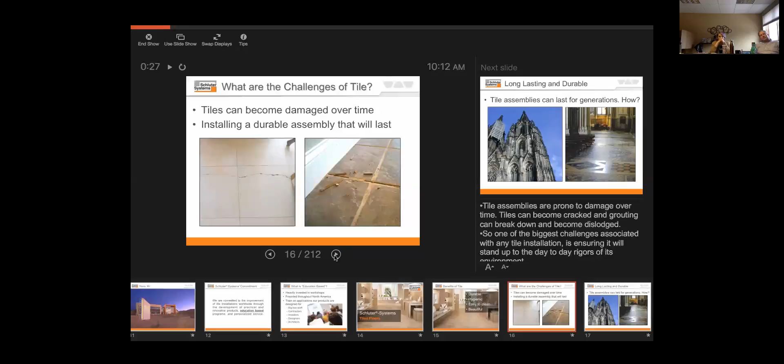But the challenges we face in the industry are what we see in these two photographs here. It's very common to walk into either a residence or a commercial space and see these types of things happening: cracked tiles, grout falling out of the grout joints. That's something we are definitely up against and is a struggle within our industry.

Looking at these two photographs, we see on the left a building approximately 900 years old, and on the right a tile floor approximately 400 to 500 years old. One of our territory managers was in Cologne, Germany at this cathedral taking close-up photographs, and was amazed he could walk through a tile installation 400 to 500 years old and not find a cracked tile or a cracked grout joint within the installation. So how is it that 400 to 500 years ago they could execute this installation, and today we have difficulty seeing a tile installation last even a couple years?

And we've got a video here that hopefully will play. Maybe not. I'll certainly make sure I can embed that video in an email and get it to everybody afterwards. Basically what the video does is give you a rundown of an installation that was executed 400 to 500 years ago, how they did that, and how it's drastically different from what we do today.

That wire-reinforced mortar bed with a slip sheet underneath it was the principle we refer to as uncoupling. Uncoupling is what allows the building to move without affecting the tile layer on top of it. With direct bond of tile, the stresses within that slab or substrate move directly through to the surface if we don't have something there to give you that forgiveness in the shear plane.

So cracks in the substrate become cracks in the tile. The other thing we see happen, specific to direct bonding to a slab, and specifically a new slab, is buckling, caused by the shrinkage of the concrete. If we install tile over green or new concrete, over that first 28 to 30 days, all the moisture leaves that slab, so it loses real estate—but the real estate of the tile on top doesn't change.

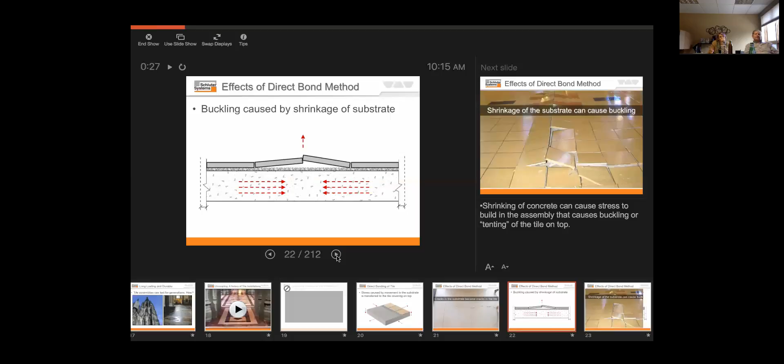And concrete cures literally for 20 years. It's just the first 20 to 30 days when most of the moisture comes out, but it's still curing. So you can still see shrinkage cracks from concrete 10 years later. We joke in our industry that there are two kinds of concrete: concrete that's cracked, and concrete that's going to crack.

So when we talk about shrinkage or loss of real estate in a tile installation, we look at this photograph of a floor in a church. What happened was they started seeing wear patterns on their tile, so they decided to disconnect the pews from the floor, since they were mechanically fastened, move them off to the side, and hire a cleaning company to buff and polish the whole floor so it would look beautiful again.

So they removed the screws, moved the pews out, and the cleaning crew came in the next day to clean—and this is what they find. All those pews were mechanically fastened, holding that tile into place, and as soon as it was released, the pressure and movement stress allowed the tile to move, and this is what happened.

So addressing substrate challenges, we're referring to our product Ditra. What we do is the uncoupling principle I briefly referred to - we also give the ability to waterproof a floor installation. We deal with vapor management, with smaller amounts of moisture from the substrate, typically a concrete floor more so than a wood floor, and we give substantial load support.

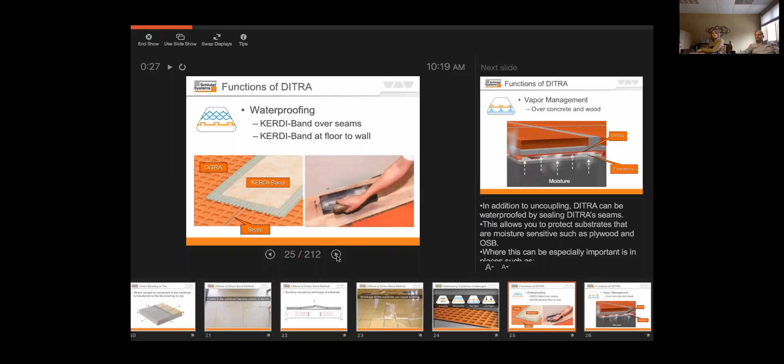Vapor management over concrete and wood - any moisture, like we talked about, concrete will cure out over years and years and years. The benefit of Ditra over a slab is that all that moisture is kept within the slab, so it's not allowed to leave, which would cause the concrete slab to shrink and crack. That moisture is kept within the slab, so it's wet curing over the life of its installation.

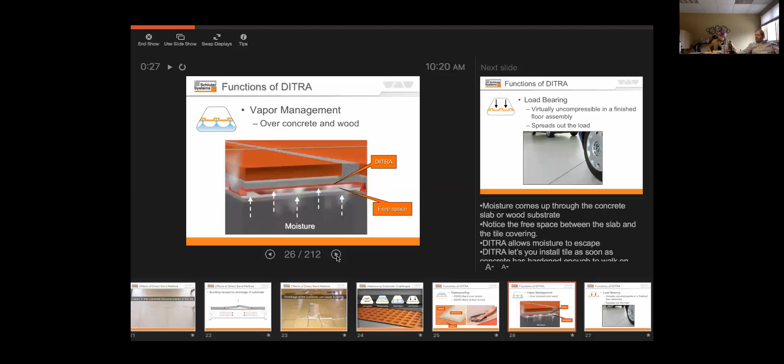And then load bearing - we see a lot of installations of tile in car dealerships, and I've been through a lot where you see cracked tile issues. But I've also been in several where our Ditra underlayment is underneath them and they're driving cars across them all day long, every day, in and out of locations where you'd bring your vehicle in for service. A lot of service departments are now drive-through, and we see a lot of success with this underneath, as far as load bearing is concerned.

I'll have to also get you this clip - this won't play, but it's just an animation that shows the function of Ditra.

I'll briefly explain it. As your substrate expands and contracts, the membrane itself, with the open airspace within it, allows for the movement to take place in your concrete or wood subfloor without affecting the tile on top. You'll notice the thin set bonding the tile to the membrane is actually filling a dovetailed square, so the thin set isn't stuck to plastic - it's mechanically fastened with that dovetail configuration. That's kind of how it works.

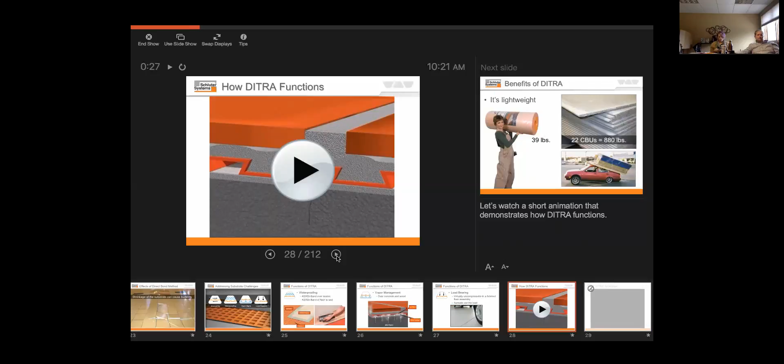As a tile contractor, this sold me - the fact that I can take the square footage equivalent of 22 sheets of backer board into a house in one trip, on one roll. Yeah, that roll she's holding there is the square footage equivalent of 22 sheets of backer board.

I can take that into anyone's house. I can cut it with a utility knife and thin set it to the floor, and within a matter of hours I'm ready to set tile. Whereas with my competition's backer board, they're still carrying it in. Or let's face it, in our climate here, in the months of November through February or March, it could be snowing or raining or just terrible weather conditions, and you're set up outside cutting this stuff, because you're not cutting a sheet of backer board inside someone's house.

It's easy to transport. You can fit essentially what you would need for a 323 square foot area in the back of a car. Whereas you see the gentleman walking out with a roll of Ditra, and you see the other two guys loading sheets of backer board into a pickup.

Like I said, easy to cut, no dust, no mess, and virtually no wasted material. For the functionality of Ditra as a membrane, you can put it in as small pieces as you can cut, virtually. The only thing where that would present a problem for you is if you wanted to waterproof it. Obviously, if you're waterproofing the installation, you would want to eliminate as many seams as possible.

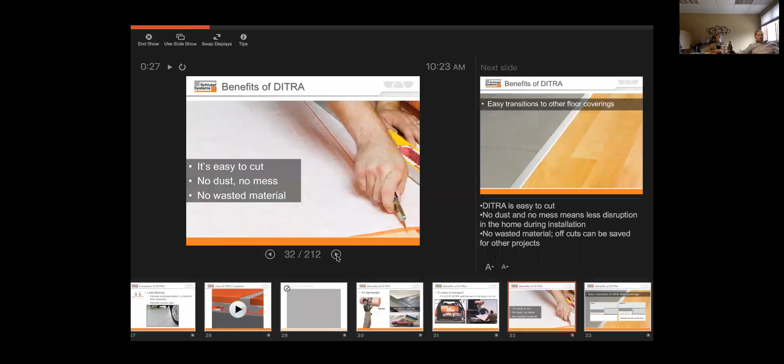This Ditra is very easy to transition to other floor coverings. We manufacture it in two different types, actually three different types now if you include our Ditra Heat product. But there's Ditra at 1/8 of an inch or Ditra XL at 5/16 of an inch. These two offerings give you the ability—Ditra XL gives you the ability to flush out with a solid 3/4 hardwood.

We brought Ditra XL out after we started noticing a lot of installers using Ditra, but then the popularity of a solid 3/4 hardwood came back, and these installers were either installing two layers of Ditra or doing a transition from wood down to tile, which was not aesthetically pleasing. So Ditra XL took care of that.

And then now we're getting back into large format tile with medium bed thin sets underneath them. These large format tiles, being a minimum of 3/8 of an inch thick with a medium bed mortar under them, are actually working out really well with Ditra to flush out to a solid 3/4.

Is there any benefit of using the cement backer boards anymore? In my opinion, absolutely not. A CBU—Duroc, HardieBacker, Wonderboard, any of them—they don't give you any structural integrity.

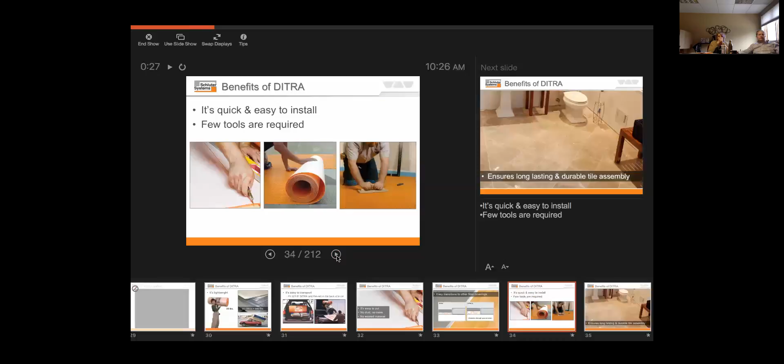So just a couple slides showing how it goes down: cutting it with a utility knife or scissors, very, very easy, troweling out your thin set, and installing it. This is ensuring a long-lasting and durable tile assembly.

So I have a quick question—is this just for floors then, or would you also use it on backsplashes and shower walls? This product is specifically for floors, but we do offer other things which are specifically designed for wall installation, and we'll get into that in a later part of the presentation.

I have a question as well—can it go over just about any other kind of floor? So if I have a customer that has a vinyl kitchen floor that they don't want to remove, can it go over the vinyl and then you can tile over that?

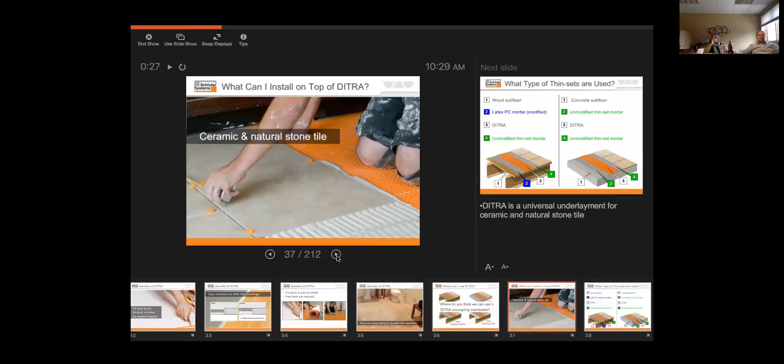So, what to install on top? Ceramic, natural stone, and then obviously porcelain. And how to install it.

Over a wood subfloor, we recommend a modified thin set to bond the Ditra to the subfloor. And then everything on top is always going to be non-modified. The reason we qualify the type of thin set is because modified thin sets need air to cure out, or they need something to pull the moisture out of them. A wood subfloor is very porous, and it's going to pull the moisture out of the latex modified thin set, whereas on top of our membrane, being plastic, air is not going to go through that. The moment we put tile over the thin set on top of our membrane, very little air is ever going to get to that. So that's why we call out non-modified, because it simply needs time, not air, to cure.

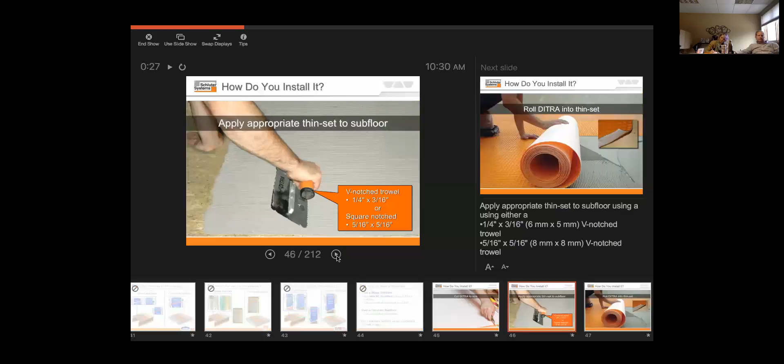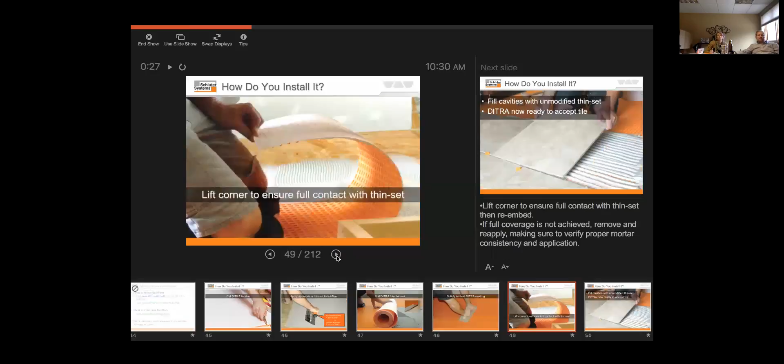Just a couple slides that show the installation real quick: cutting it to size, appropriate amount of thin set going onto the floor. Roll the Ditra into place, embed it using a wood float or a grout float. Pull it back to ensure that you've got coverage. Fill the cavities, trowel thin set, and set tile.

Here's some of the benefits that I like to quickly go over, just to show the amount of weight that you're eliminating, the amount of time you're eliminating, and all the mess that you are eliminating.

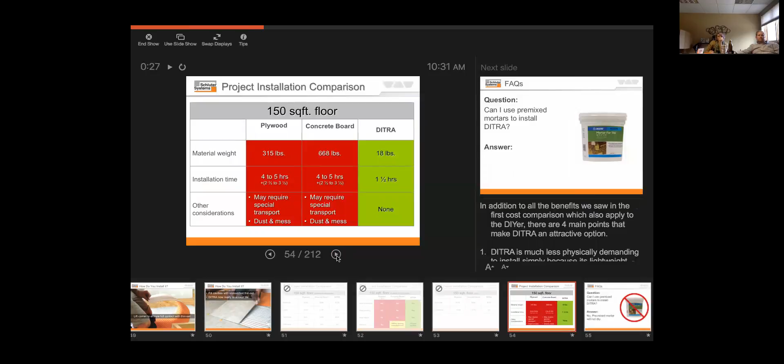So, premix mortars to install Ditra? Never, please never, we don't like premixed anyway. I like to call that Satan in a bucket. It is not your friend. I simply illustrate the fact that I can go to any big box store, grab that bucket off the shelf, not knowing how long it's been there. I can crack the lid on it, it is pliable, I can use it on a job, put the lid back on, set it on a shelf for another 6 months, go back and crack the lid again, and it's still pliable. It's the equivalent of Velveeta cheese. So definitely, please, please, please do not use that.

So is it necessary to apply Kerdi-Band to the seams of Ditra? Only in a waterproof situation. Perfect.

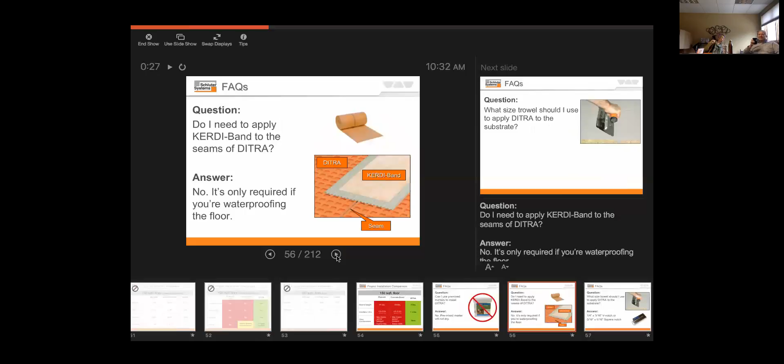And the trowel size is a 1/4 by 3/16 V notch, or a 5/16 square notch for installation.

What kind of warranty does Schluter offer? I like to qualify our warranty versus a lot of other warranties in the industry. It is a 10-year warranty, but it is a labor and material warranty. Typically, a lot of manufacturers offering a lifetime warranty, it's product only, and a lot of times prorated.

If you use another manufacturer's underlayments and your total costs are $500 to install your floor, underlayment and thin set, and 5 years later you have an issue, they're going to give you the prorated value of that $500 worth of material, which barely covers a fraction of your tile. Our 10-year labor and material warranty covers the cost of tearing everything out, all the materials that need to go back in, and the labor to put it back in.

Where are the gray areas, as far as if it's installed correctly in the first place, or do installers need to be trained for that to follow through? The only gray area is installer error. There is no requirement for being a certified installer. Obviously, if it was installer error and the installation was less than stellar, you would have issues regardless if it was our product.

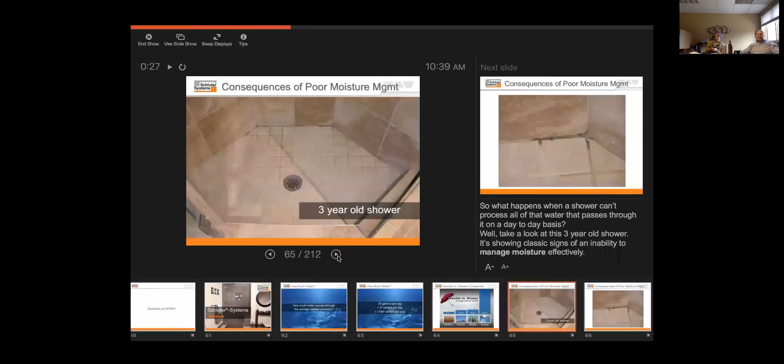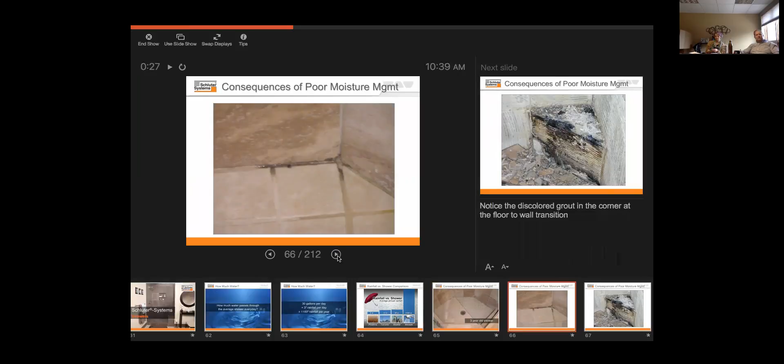So here's just a couple of slides that are going to show you how not to execute a shower installation. We look at a 3-year-old shower, and this is a little bit unsightly. It's not horrible, but this is what's underneath it. And if we could add a little bit of scent to these slides, in this one you would vomit. I personally had to tear stuff like this apart, and there's moments where you just have to go outside and get some fresh air because it will make you sick.

So why does it happen? Tile, grout, and thinset are not waterproof. Yes, when we look at a shower functioning, we see the water hits the tile, the water runs off the tile, and it runs to the drain. That's water in its liquid form. But moisture penetrates behind the tile in a vapor form, and it cannot exit the shower enclosure. So a shower must be able to manage moisture in both liquid and vapor forms.

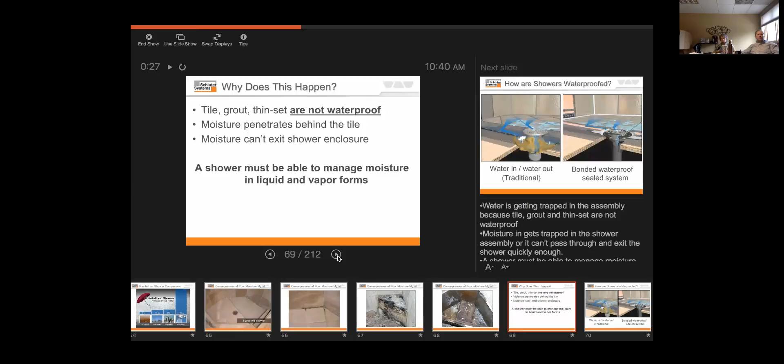Two different types of shower systems and how they're waterproofed. You have a traditional water in, water out system on the left, and a bonded, waterproofed, sealed system, our Kerdi shower system, pictured on the right. The water in, water out requires a lot of special skills and a lot of components from various manufacturers, and the only person that can warranty this installation is the installer who puts it in. You will never get a water in, water out system with 4 to 5 different manufacturers involved, and you will not find one of them that will warrant it.

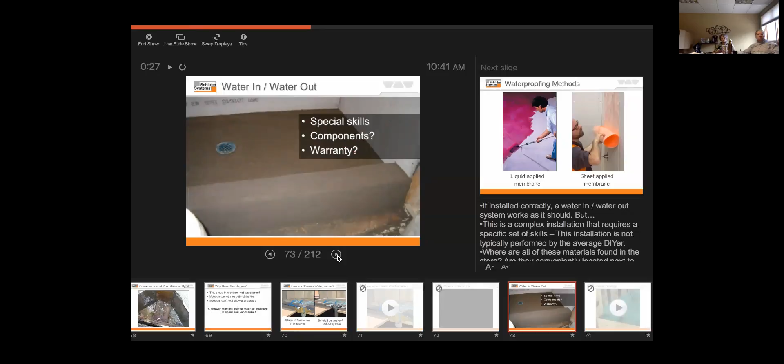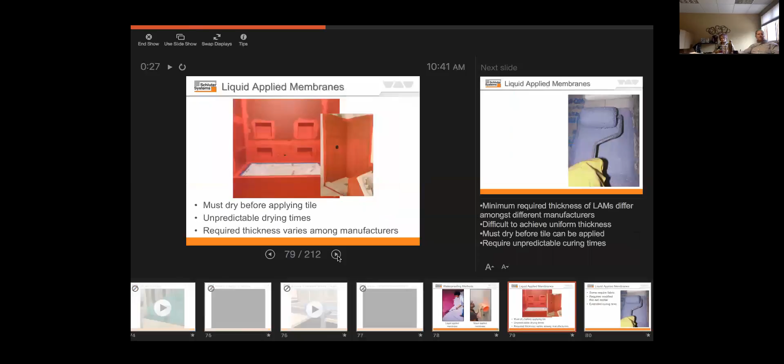So waterproofing methods: we have liquid applied membrane or sheet applied membranes. Just a couple of photos of liquid applied membranes. With these, they must be dry before we can apply tile. There's unpredictable drying times based on job site conditions, and required thicknesses vary among manufacturers. A lot of times with these liquid membranes, you're looking at 2, 3, sometimes 4 coats to get to that appropriate mil thickness for it to be waterproof.

Some require fabric where panels meet, where inside and outside corners combine. They require modified thinset mortars, which brings about extended curing times. They're difficult to integrate with traditional 2-stage drains. It's very time consuming, waiting for things to dry, and there's always opportunity for failure.

I think of seeing people bringing products back to a supply house after their installation is complete, specifically an extra bucket of liquid applied membrane, which they viewed as extra, but was actually essential to the successful installation of that shower. Their statement was, well, I got it all covered with 1 bucket, I didn't need the second bucket. No, you actually did need that to get to the appropriate thickness. So those things will in turn rear their ugly head in due time.

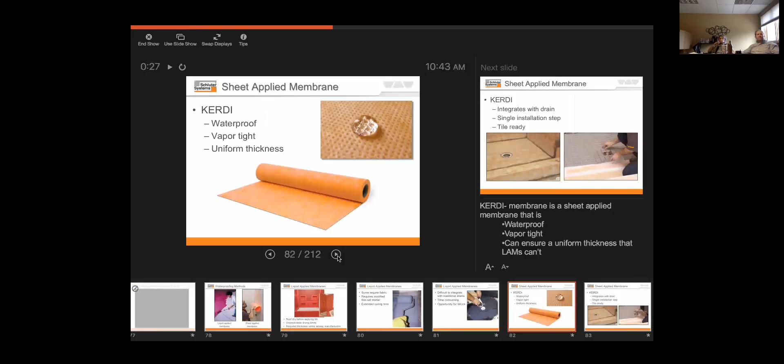Our sheet applied membrane Kerdi is waterproof, it's vapor tight, and it's always the same thickness, a uniform thickness. It integrates with our drain. It's a single installation step, and it's ready for tile the moment you're done installing it.

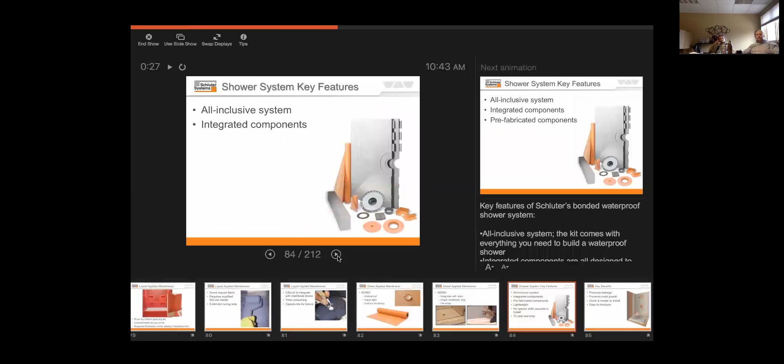So the key features are it's an all-inclusive system. We have all of our own integrated, prefabricated components. They're all lightweight, and there's no special skills required to install this. It's very, very simple. I've got photographs of my 9-year-old daughter installing all of these components. And this is also covered by our same 10-year warranty, labor and material.

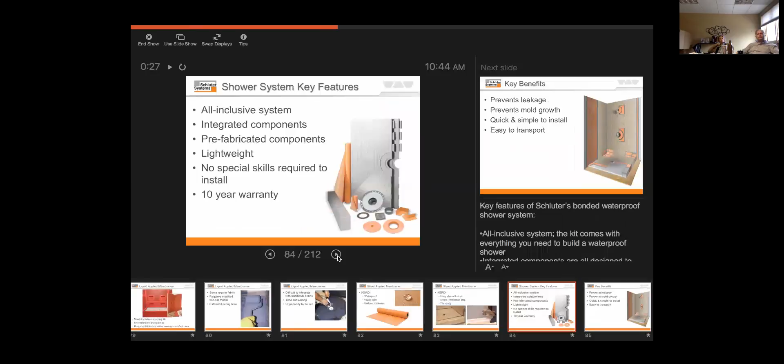So the benefits are that it prevents leakage, it prevents mold growth, it's quick and simple to install, and it's very easy to transport. These products come in kit form, or you can buy all the components, parts, and pieces individually.

So how that benefits you: we see that kit right there is for a 48 by 48 shower. Well, let's say we've got a 48 by 60 shower. You could purchase this kit and buy additional components, parts, and pieces to add to that kit, or you could just start and buy all of the components separately.

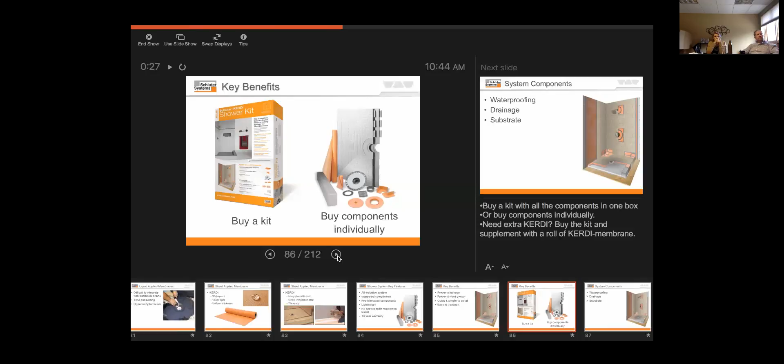So the components, the three different areas that we refer to are waterproofing, drainage, and substrate. Waterproofing, we're referring to basically everything you see there in orange - our Kerdi membrane, our Kerdi banding, our inside and outside corners, all of those components. Drainage, we're referring to our drain.

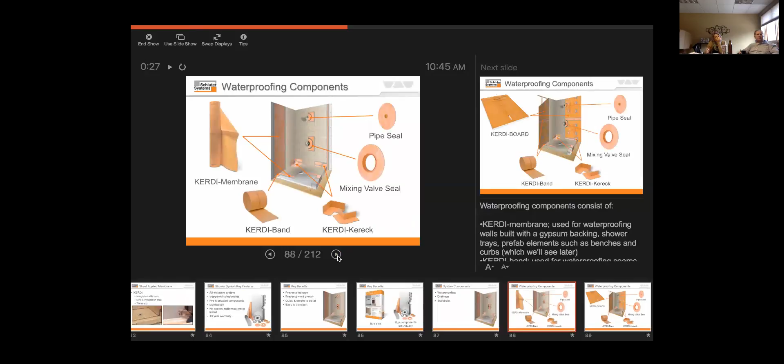So here is all the waterproofing components. Kerdi board is also another option in place of Kerdi.

Kerdi board is a building panel that comes in 3/16 all the way to 2-inch thicknesses in all different increments. Our 1/2-inch board is most popular for installation over 16 on center stud spacing. So if we're in a remodel application and we're tearing out an existing, we could just simply install 1/2-inch Kerdi board over that stud spacing, make waterproofing connections wherever there's a seam or a screw and washer that holds it on. And at that point, we're ready to set tile.

The drain assembly. One of the most unique things we see with our drain versus traditional 2-stage drains is the fact that we make a square grate. Most of our mosaic tiles that are going on our shower floors are square, so having to cut a circle in those squares is very, very difficult. So having a square grate to match up with those mosaics is not only aesthetically pleasing, but it's also a time saver for the installer. Is there a round option available where it would apply?

Yeah, we do have a round option. It's a 6-inch, but it is an option.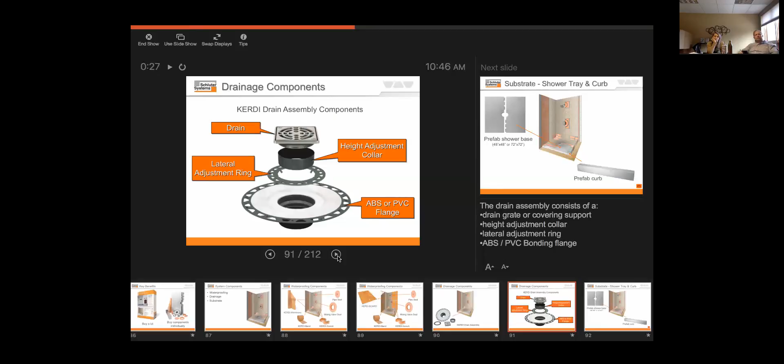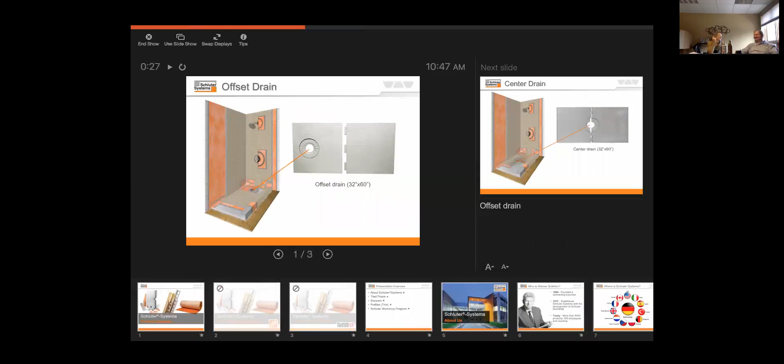So our prefab shower bases come in our square configuration, 48 by 48 or 72 by 72. Can those be cut down to size? They can. We have a 32 by 60 offset and a 32 by 60 center. And the question was, can they be cut down? Yes, they can, and they can also be extended.

So it is an expanded polystyrene or a dense styrofoam, very easy to cut with a Skil saw, an extendable utility knife or box cutter, or you can run it through a table saw.

Here we're showing an installer extending it with dry pack mortar. Dry pack mortar is a material that you would use to do a traditional water in, water out shower and float the entire floor, where here we're simply using it just to merely extend the shower.

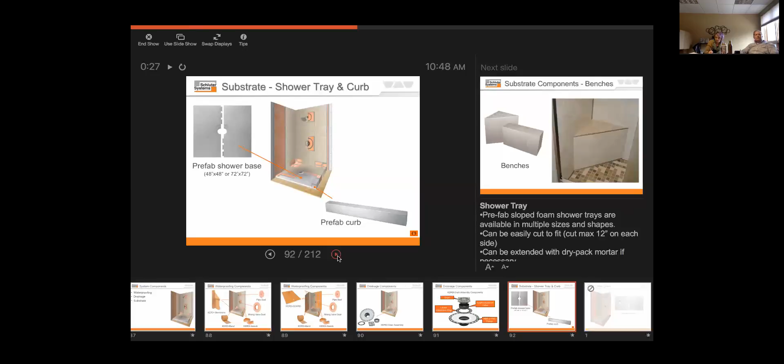And then the prefab curb - that curb is a 6-inch height. That is also something that in the field I never installed at a 6-inch height. I always ran it through a table saw and brought it down to anywhere from 3.5 to 4.5 inches in height. Less of a stumbling issue for people.

We also prefab some benches. And this is one of our biggest selling items that just came out probably about 4 or 5 years ago now - these preformed shower niches in 6 by 12, 12 by 12, 12 by 20, and 12 by 28 are the inside dimensions on those. And the two larger ones have a shelf in them, which would be determined at the time of tile installation. You would set that to a fixed position. A lot of times I'll take those larger ones and I'll install them horizontally and just leave the shelf out.

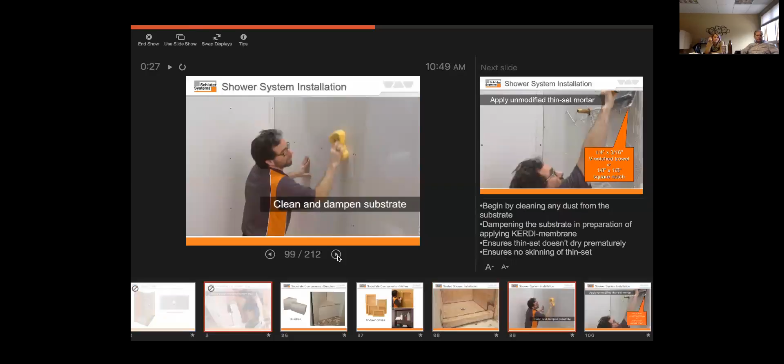So a sealed shower installation - I'll kind of quickly go through these slides, just giving you a rundown of how this stuff goes together. The importance of cleaning and dampening the substrate is so that we don't prematurely dry out the thin set, because we're installing just a small amount of thin set on the wall, just enough to seat the membrane.

Is that on green board or is that on standard drywall? That's a fantastic question. And the answer is you can utilize a green board or a blue board or a moisture resistant panel, or what we're showing in these slides is just a regular sheetrock. You can also go over cement board, but the cost and the time to install it is more than that of drywall.

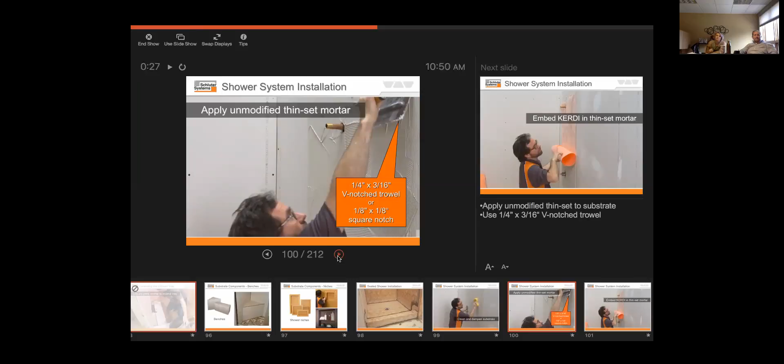Or if you, like you say, in a remodel situation, you wouldn't use drywall, you'd use the Kerdi board. Correct. What we're seeing right here, instead of drywall, would be Kerdi board, and we'd just be making some banding connections.

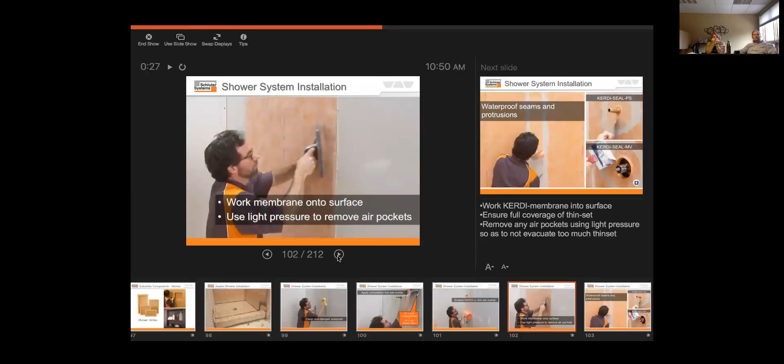So we're embedding our Kerdi into the mortar, and we're not trying to squeeze all the thin set out that we just installed on the wall. We're just trying to evacuate the air from behind it. It's very similar to the installation of wallpaper.

Here we're showing the banding connections and pipe seal and mixing valve seal going on. Then switching down to the floor, changing to a larger trowel to install the tray.

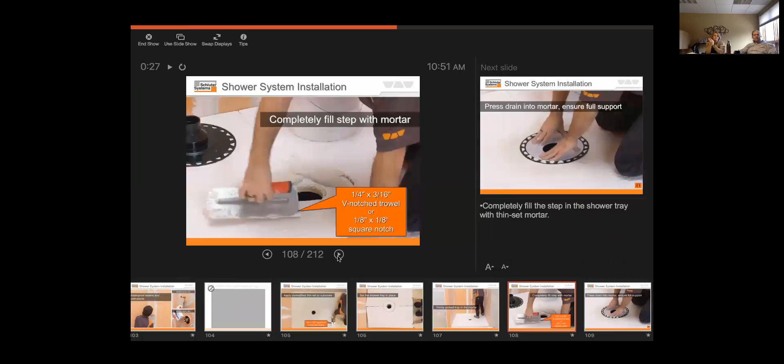The shower tray gets set into place. We lightly walk on it just to bed it. Then we switch back to our smaller trowel and fill the recessed area of the tray so we can seat the drain. We want enough thin set so that the drain is fully supported.

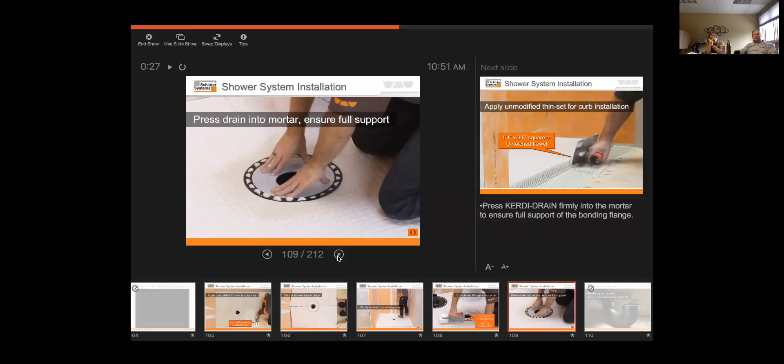Trowel out thin set for the curb, making sure we have a thin set connection between all these components. You see it there where the curb is going to meet the tray. We've got thin set, and also you'll notice there's thin set on the end wall where the curb meets the wall.

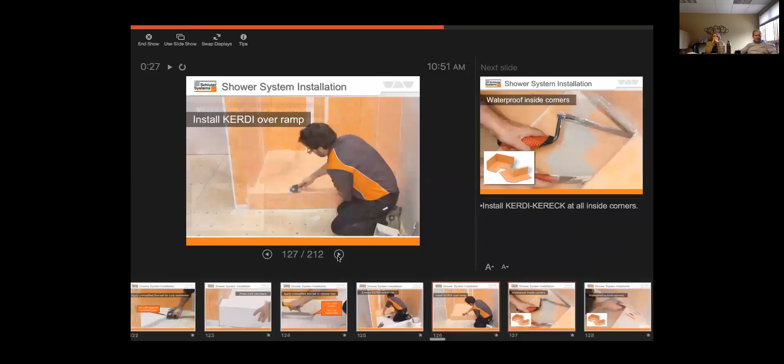Back to our small trowel again, we're troweling the thin set out over that pre-sloped tray, bringing our KERDI out and up and over. You'll see how the inside and outside corners make those connections very simple, and then simply banding between those corners. That is a completed waterproofed installation.

On that 4x4 shower you're seeing right there, now granted I've installed probably over 100 showers, so I can execute that in 2 hours or less.

What about the corners if you have that curb meeting up with a glass panel? So a shower we're working on right now has 2 walls of wall tile, and then 2 walls of glass door, glass panel. But that curb will obviously be butted up to one of those glass walls. Oh, I see what you're saying.

Do you have the ability to tile the end of that curb before that glass wall goes on, or are you talking about a glass block wall? No, it's just a glass panel that's going to be panel installed. We do make a profile that is a U-shaped channel, a half inch, which receives a 3/8 panel of glass very well. That's something that could be installed within the tile installation, and then the glazers can just drop their panels into it. That presents an option for you. There's almost always an answer.

So a little bit more into KERDI-BOARD. It's also waterproof and a vapor retardant panel, just like our KERDI membrane is. It's unaffected by moisture, dimensionally stable, flat, plumb, level, and square. It's very lightweight, 95% lighter than cement backer board.

It does have an R2 value on a half-inch panel. And it also gives you printed grid lines, which are great for cutting, making it very easy to take dimensions and make your cuts.

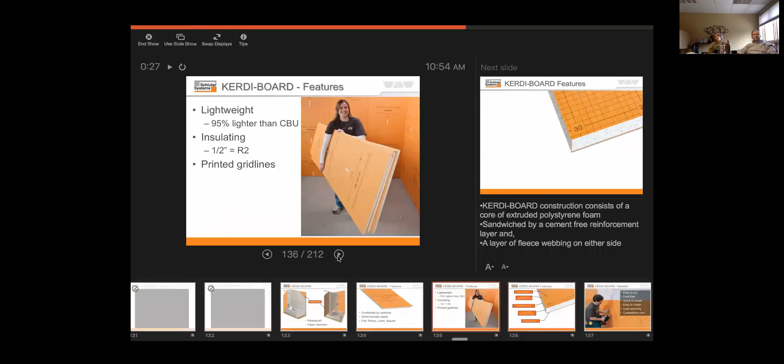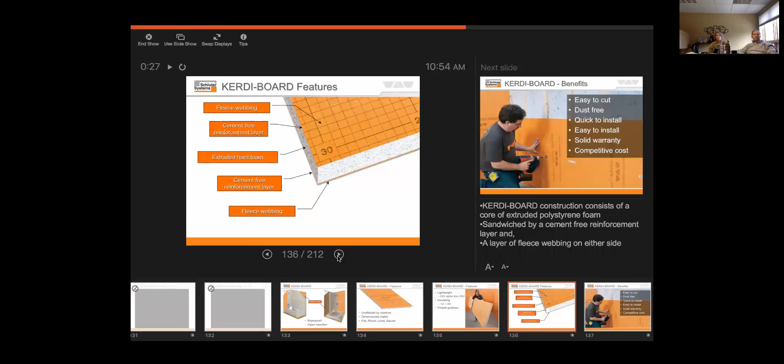So it's an extruded hard foam with a cement-free reinforcement layer and then the fleece webbing waterproofing on the outside. It's easy to cut, dust-free, quick install, very easy to install. It has the same 10-year warranty that covers labor and material, and it's competitively priced compared to putting in a half-inch cement backer board and then covering it with a liquid waterproofing membrane to get that same waterproof, vapor tight scenario. And it's ready for tile.

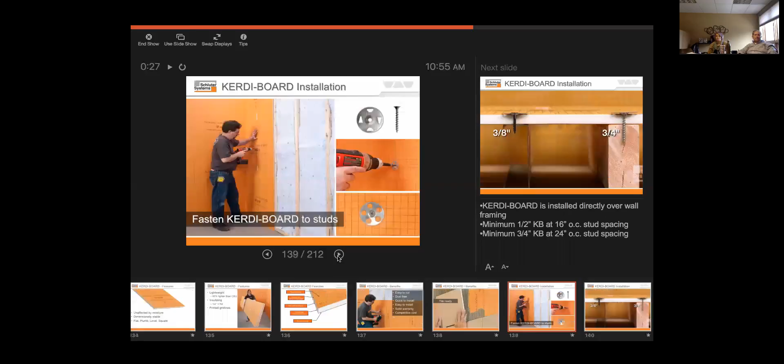So this is how it's fastened with a screw and fender washer, shown both over wood or steel studs. On a wood stud, we want 3/4 of an inch penetration into the stud, and on steel, 3/8 of an inch penetration. Maximum of 12-inch spacing, but notice on the bottom of that slide that a single screw and fender washer is holding both panels together.

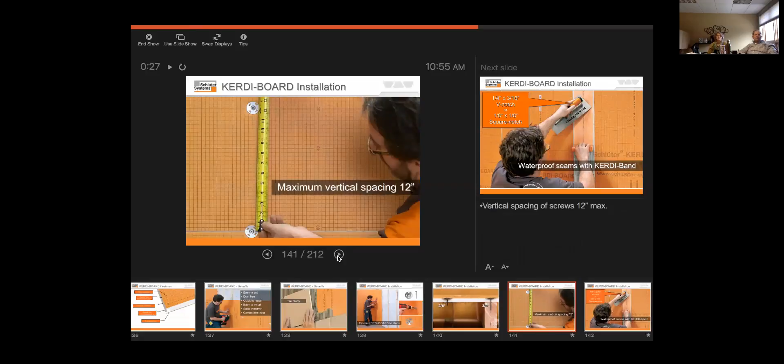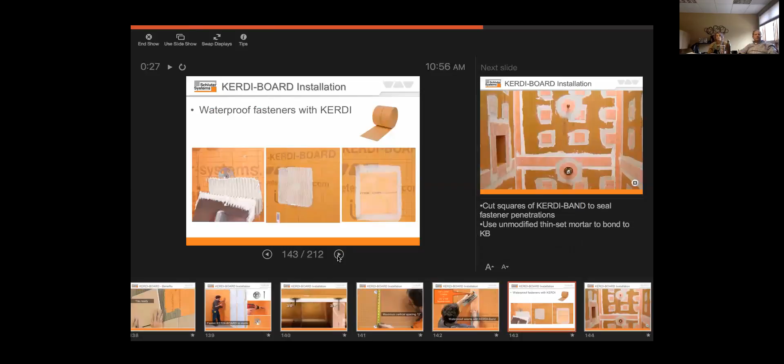We're banding our seams, and then anywhere where we have a screw. And there you have a completed shower installation with KERDI-BOARD.

So I was going to ask, for the walls, how do you know when you should use the KERDI-BOARD versus that membrane? I like to equate it to a remodel application versus a new construction application. In a new construction setting, in my opinion, it's easier if you can trust the builder and the sheetrock contractor to give you a somewhat level and somewhat flat surface to work off of. It's easier to just come in and hang the fabric membrane.

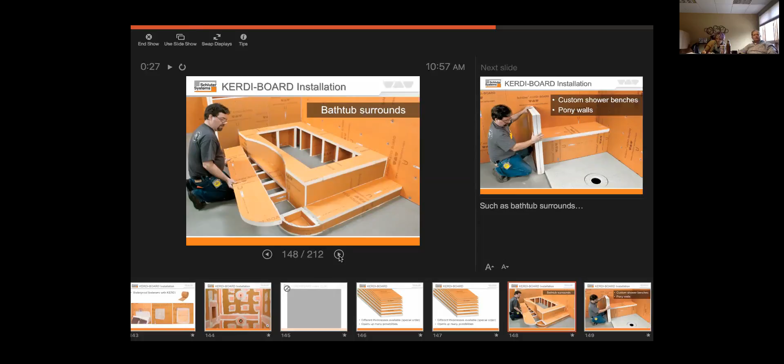But in a remodel application where you're tearing out existing and you have to put up a panel again, it's more time effective to put up a panel that's already waterproof, where you're simply making a banding connection and some connections over some penetrations. That makes sense.

You're also able to build custom benches and partition walls. You can use it for tiled countertops, and also over a backsplash you can use a thinner board. Let's say we had to tear out an existing tile backsplash and the wall was all marred up. Rather than cutting all that drywall out and replacing it, you could go over it with a 3/16 inch board and float out some of those imperfections.

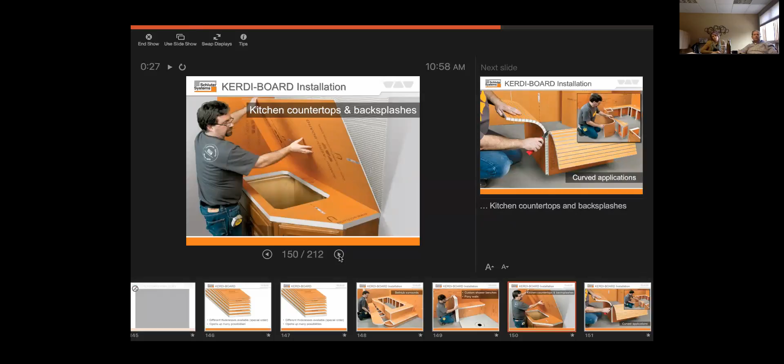We also have the ability to do curved applications with what we call a V board. It's a curved panel, so you can bend it to different radiuses.

Do you have to do anything extra for waterproofing with that? With this V board, it depends which side you're placing out. If you're placing out the side that has all the curves in it, you would have to cover that with KERDI fabric. If the side that's facing out is the side facing the installer in this picture, that side is already waterproofed—it's only the side with the cut in it. If you had to face that side out to get a more drastic radius, then that side would have to be filled with thin-set and waterproofed.

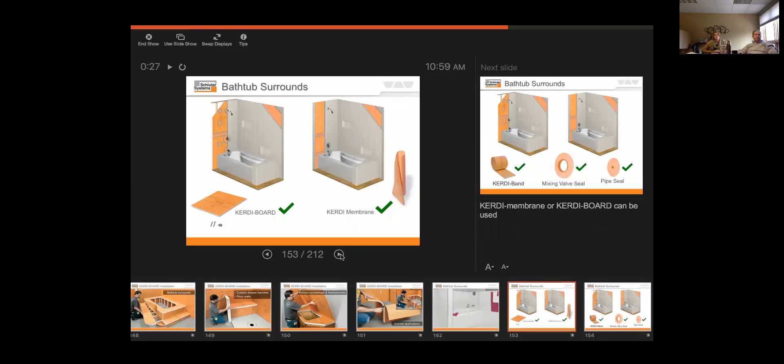So should one waterproof the corners or the walls first if they were putting KERDI membrane over drywall? Any ideas, any guesses? Corners. I'll say walls, just to be the adversary. The answer is it doesn't matter—they're both right. The key to this system is just merely a 2-inch overlap, so however we achieve that is totally fine.

So what type of thin set do I use? We briefly went over it during DITRA installation—unmodified, so it's just a thin set comprised of Portland cement and sand, and once again, no premixed. The trowel we use is a 1/4 x 3/16 V notch or an 8x8 square notch.

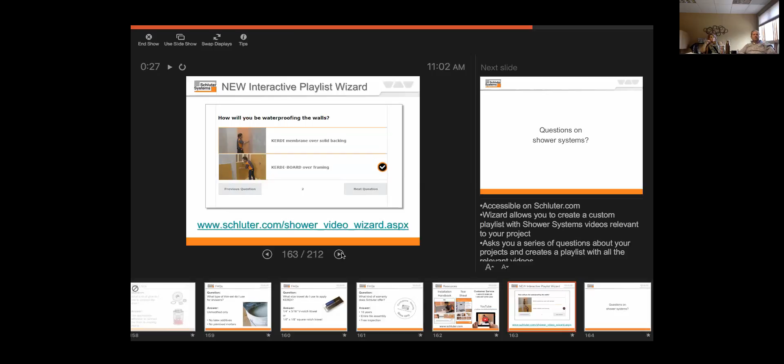It's really nice, and that is available on our website. The nice feature with this is if you are working with a customer and walking them through this, and you do not want to take the time there to watch it, you can either save it or share it. Share gives you the option to just send it to them in an email. That's great.

Any questions on showers? I don't think so. All right, moving on to profiles.

What do they do? They protect the tile edge, provide a finished appearance, transition to other surfaces, accommodate movement, and they replace expensive—or I like to add non-existent—ceramic, porcelain, or stone trim pieces.

A lot of the tiles coming out nowadays do not make a coordinating trim. They just don't do it, or they quadruple the price of the project if they do. A lot of trim pieces that are pre-manufactured to coordinate with the tile are, I'd say, at minimum $8 per foot, some a little less.

That's to your advantage when using Schluter trim pieces. The trim for porcelain and ceramic is never made at the same time as the field tile, so it's not really a match—correct, they're a different dye lot, and a lot of times a completely different material. There are tons of variables that can make it difficult to get that installation to look nice.

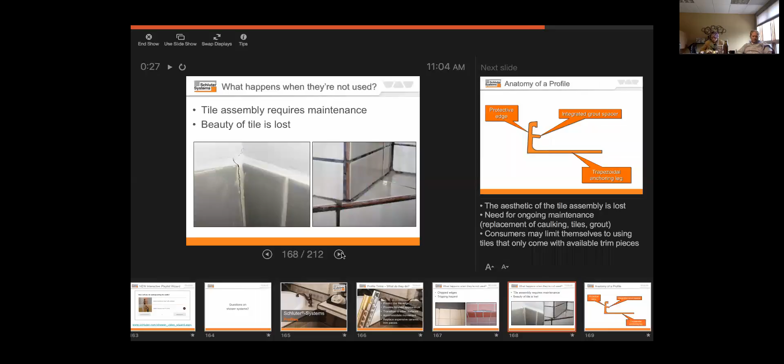But over time, even that can become damaged. This is where they either didn't order the appropriate trim pieces on the right, or they were just too lazy to take the time to figure it out. That's a lot of times what we see too. Then on the left, an inside corner in a commercial space—a lot of times you'll see a cracked grout joint or cracked caulk joint where tile meets tile.

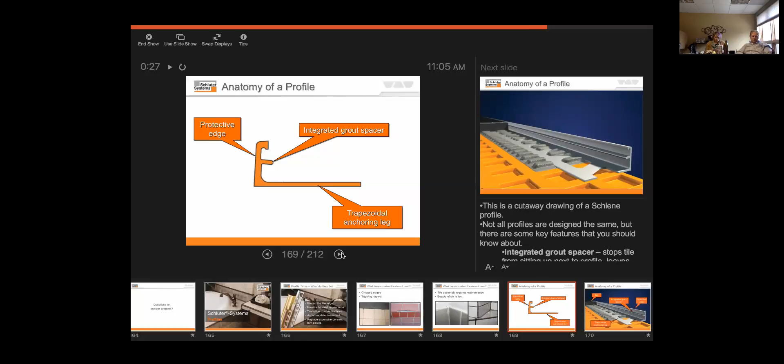So the anatomy of a profile is the protective edge, an integrated grout spacer, and a trapezoidal anchoring leg. Here's how it's installed: that anchoring leg is bedded within thin-set, the tile is abutted to the grout spacer, and the protective edge does its job.

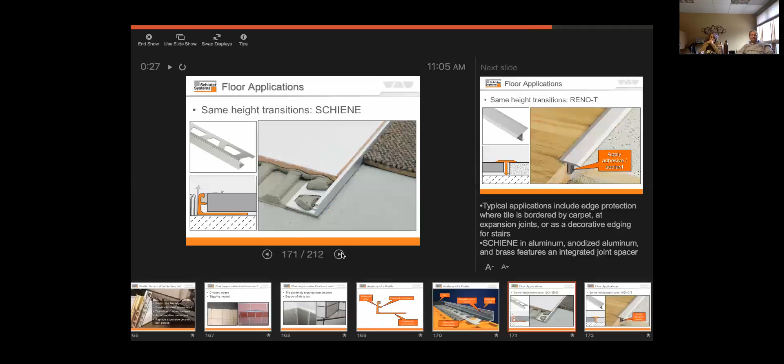So Schiene works great for same-height transitions—you're left with just a very small visible metal profile edge. RENO-T is a profile that installs with adhesive or sealant within an open grout joint, also for same-height transitions.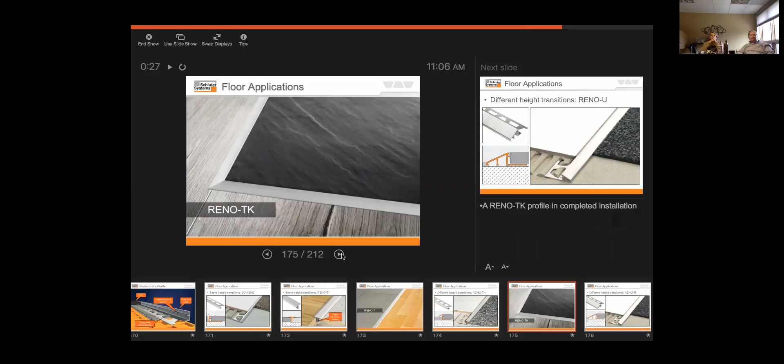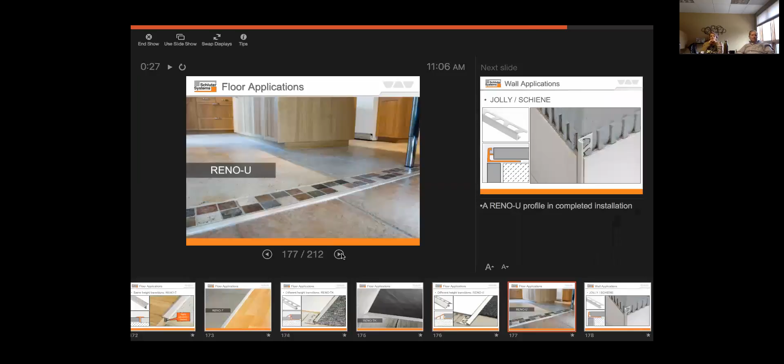Reno TK is a fantastic profile when used butting up to carpet—it gives your carpet installer an area to tuck his cut edge into, and also works for other floor coverings if you're just reducing down. Reno U is great for butting up to VCT or carpet tiles that are thinner, or to a tile transition that's lower.

And Jolly or Schiene is great for wall profiles. So here's a question: Jolly and Schiene are both the same L-shaped profile—why do they have different names? Any ideas? One vertical, one horizontal? The application changes—inside corner or outside corner?

The reason for the difference in name is that Schiene is specific to floor installations because it's an anodized aluminum, stainless steel, or solid brass profile, whereas Jolly is PVC or color-coated aluminum—not acceptable in a floor installation because PVC would break and color-coated aluminum will wear. So that's the purpose for the two different names. But Schiene in anodized aluminum, stainless, or brass can also be used in a wall installation.

Jolly is definitely a lot less expensive. Schiene in just anodized aluminum is a very inexpensive profile too, but the PVC profiles are very inexpensive per linear foot, and some of the color-coated aluminum options are also not too bad in price compared to porcelain, ceramic, or stone trim pieces.

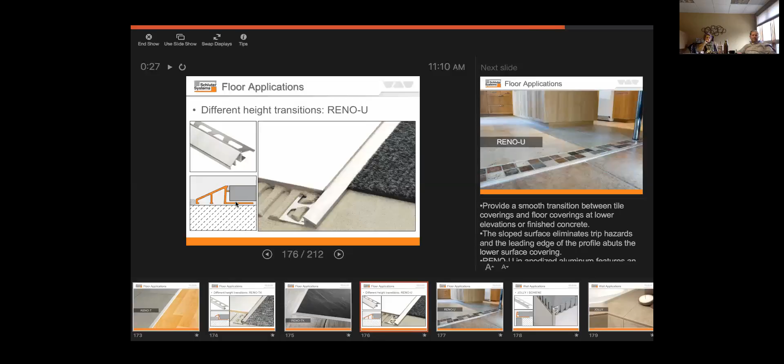Does that answer your question? Yeah, I think so. I guess the point is there probably is a profile that would work, Darcy. Yeah.

So our other option was to just use the marmoleum so that it really reduces the height. Right, but you'd still need to use some type of transition anyway.

Yeah, but we've got the profile chain sets here, and everyone has one. You should have one of the chain sets. I haven't received anything in the mail yet, so I don't know if you had kept it, because I was going to try to be up there. That might be it. That could be, I'll look. A package should have gone to every location on the list, though. Okay, we'll double check that I put you on the list and that you were going to be here.

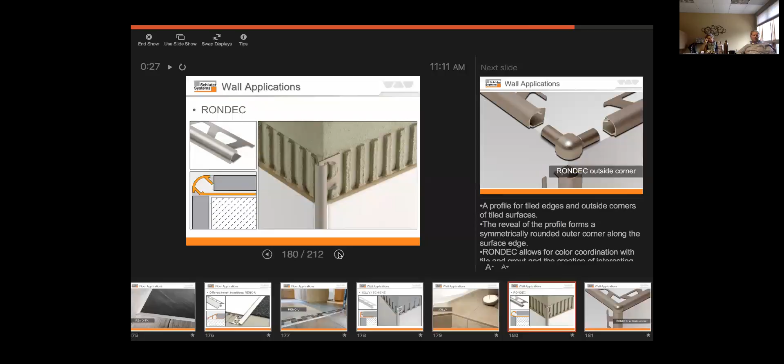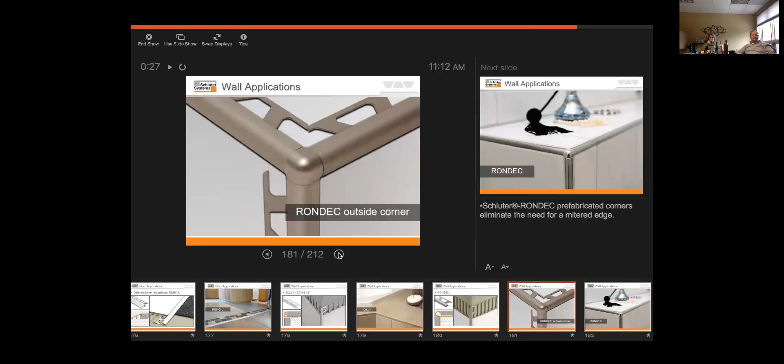Here's our RONDEC profile with a rounded edge appearance, somewhat similar to a bullnose. This has coordinating outside corners, giving the installer the ability to make square cuts and butt into that nice rounded edge instead of trying to miter things. You also have inside corners. Finished installation with it as a topper on a ceramic base.

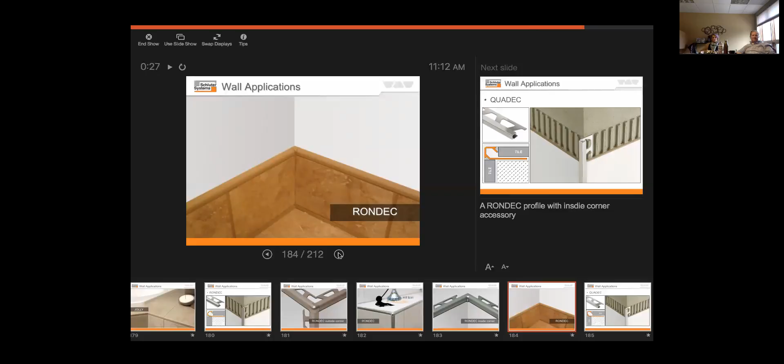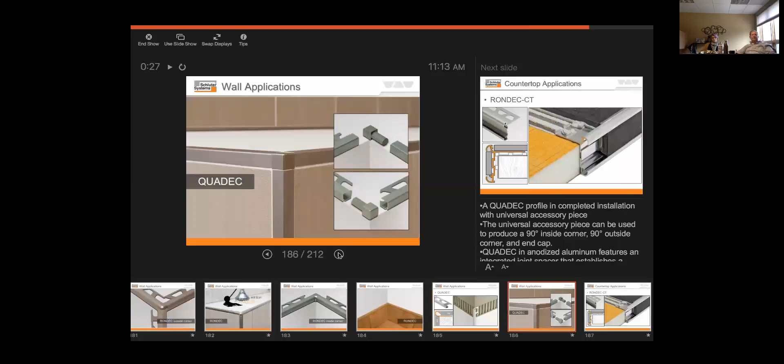Also very similar to that RONDEC, but with a squared off edge, is our QUADEC profile. The corners for this are the same whether you're doing inside or outside. Personally, I don't see the benefit, and I know I'm taking money out of my own pocket saying it, but I don't see the benefit of using it on the inside. I would just butt them square and save yourself some money that way. But on the outside, they're fantastic.

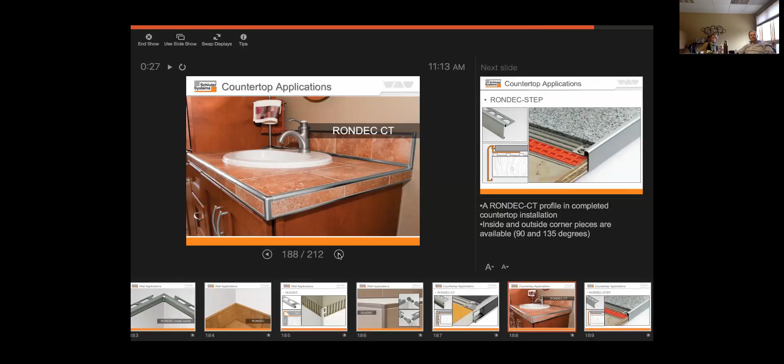This RONDEC-STEP profile is great. Throughout the Midwest, we've got a lot of tiled areas that go into a set of stairs going to a basement. This profile was something I used in a lot of installations to both cover and protect the edge of my tile, as well as cover up that unsightly 3/4 subfloor, giving you a very nice clean transition to that carpeted stairway going into usually a finished basement.

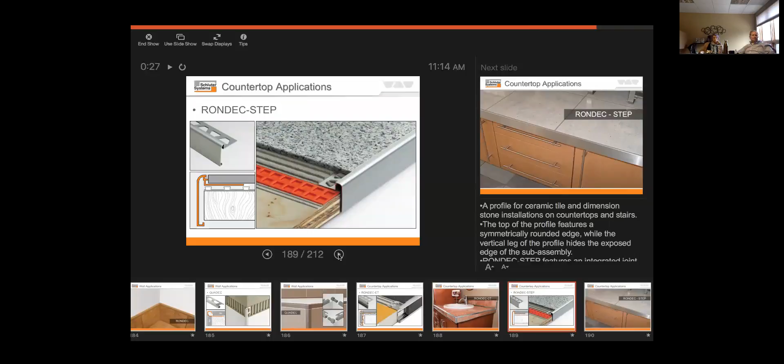That RONDEC-STEP profile can also be utilized as a countertop profile as well, which we see there. So Andy, when we were talking about refinishing my kitchen counters with the large format porcelain tile, this could be used for that. Yeah, I was thinking that myself, so yes, we'll do that. I've got some pictures I can share with you of a tiled countertop install I just did. Fabulous, that solves every problem. Yeah, exactly. And then obviously a commercial set of stairs.

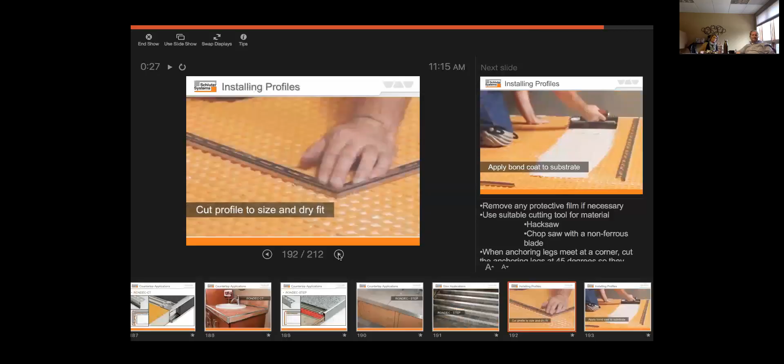So installing profiles, just real quick, cut them to size and dry fit them first before you get them smeared full of a bunch of thin set to find out they're not the right size.

Then we will apply our bond coat of thin set. Comb out your mortar, set the profile in place and embed it. Then comb additional thin set out over it. This is very, very key to the successful installation of a floor profile.

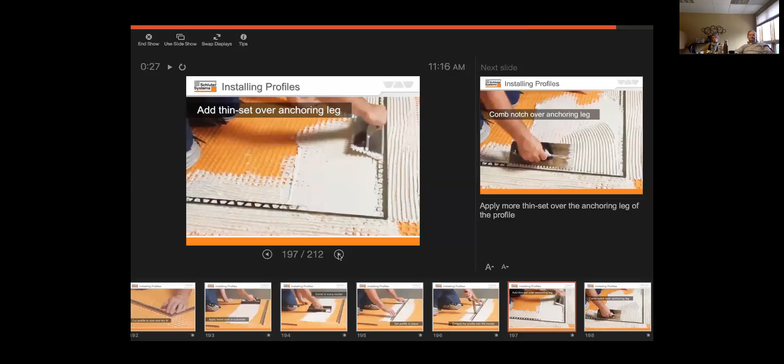Wall profiles, you can get away with sliding them in after your tile's up. But on a floor installation, we call it an anchoring leg for the reason that it needs to be anchored. So if we don't have a full bond of thin set from the subfloor, or the membrane that we're going off of, all the way through to the tile, that profile's not anchored. And then it's allowed to move, therefore cracking grout, therefore becoming just as unsightly as a broken edge of a tile.

So we're combing thin set over that leg. This is also something that is really crucial for successful tile installation, is back buttering of tile.

I would venture to guess that 60 to 70%, if not more, of the installers out there today do not back butter tiles in a tile installation, which is one of the biggest reasons we go out to look at claims. We get out there and we find that after we break a tile off the floor, we've got 20 to 30% coverage on the back of the tile that was bonded to the floor.

The industry standard on a floor installation is 80. You need to see 80% coverage. In a wet area, that number is 95%. Large formats, 100% coverage.

Yeah, your large formats, it's essential to a successful install, because otherwise you end up with air pockets underneath those big tiles. It's gonna teeter, and then the second you drop something on it, it's gonna crack instantly.

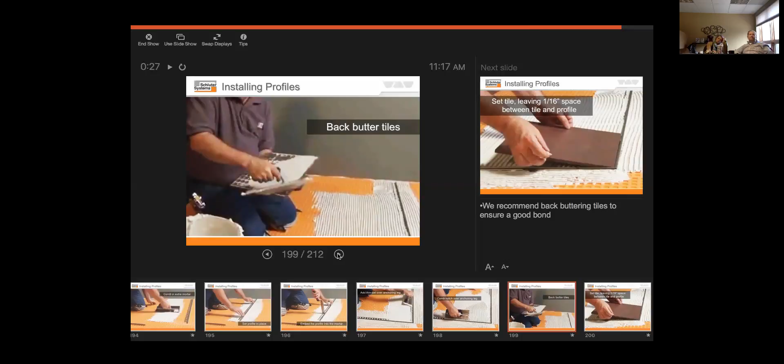So we set the tile with that integrated grout spacer, leaves a 1/16 of an inch space.

So what size profile should we use? I'd like to reference the fact that this illustration is very realistic for a tile size that's about a 13 by 13 or smaller. Some of the large format tiles that we're getting into now, though, we need to account for our mortar bed that we need to use to install those. So if we've got a 3/8 tile that's 12 by 12 or 13 by 13, a 3/8 profile is exactly what you want to use.

If you're getting into 12 by 24, 16 by 16 or larger tiles, I would say you want to jump up to the next size profile above the thickness of the tile to accommodate for the medium bed mortar that you're using to set that tile.

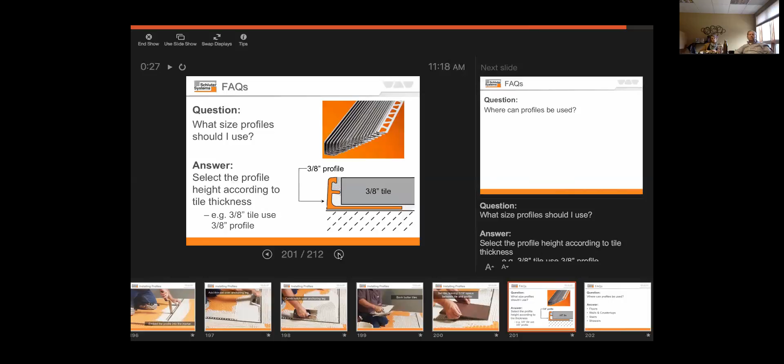And profiles can be used almost anywhere. Floors, walls, countertops, stairs, and showers. So you said almost, where can that not be used?

I would say the only areas that we've seen some issue with profile installations is specific to the type of material, and sometimes within exterior applications, we're exposed to a ton of direct sunlight.

Just if you get something that's a little bit out of the ordinary, we like you to reference us prior to doing that install.

We have had some issues with some of our stainless profiles. We manufacture two different kinds of stainless, a 304 and a 316, I believe, are the two different types. Swimming pool areas, you have to use the higher grade stainless, or the chlorines or the salts will eat away at them and tarnish them.

So I think commercial kitchens, we could also be in the same situation. Yeah, commercial kitchens, you would want to use the higher grade stainless.

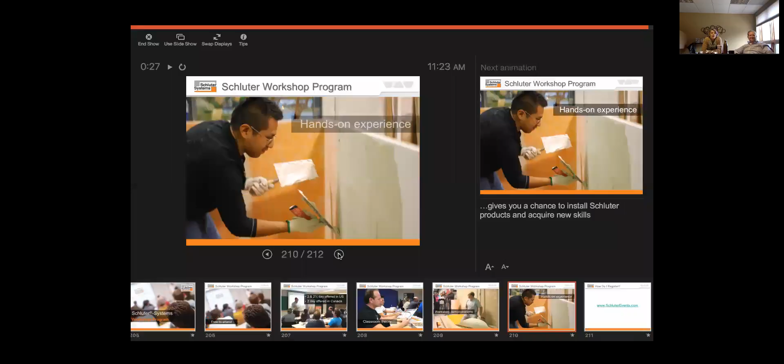Where to register: schluterevents.com. You can simply go online and register for that. There is no cost. The only thing they do ask for is a credit card if you are going to stay in a room with us, and that is merely for incidentals or for the event that you do a no-call, no-show on us and we get billed for the first night of that room. But we do verify with you 72 hours prior to attendance.

We do 3 calls and then an email. If we get no response from you, we take you off the list. If we do get a response from you saying that you are coming within that 72-hour period, and then you still no-show, that's where you would get charged for the room.

Yeah, it's fantastic. Prior to working for Schluter, I was using their products for about 5 years in my business, and I attended 3 different workshops throughout that 5 years. So it's great to attend when new products come out or just for a refresher.

Nice. You said that training in Milwaukee would be March 30th and 31st then? Yeah, I have the information, I can send it out. I just wanted to wait until after today.

Is that an all-day event then? Yeah, it's all day, 2 days. Rough idea of the schedule: 7 to 8 a.m. is breakfast. And then we usually wrap up at around 4:35 on day 1, and between 3:30 and 4 on day 2.